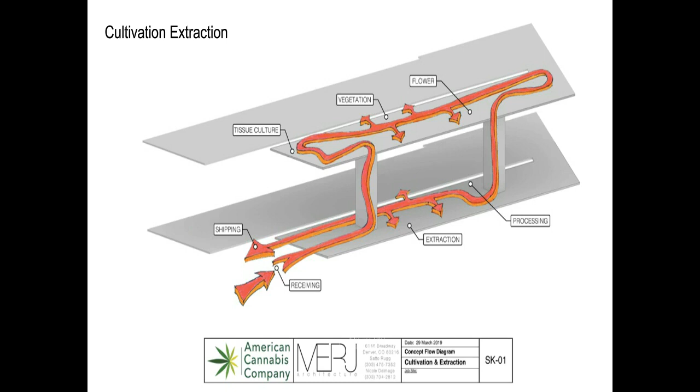Starting from those initial pieces leads into how the rest of the facility is going to be laid out and designed. So I want to go into lighting methodology and some of the ancillary spaces. There's so much stuff we've got to look at in a grow facility that cannot be overlooked, and working with a team like you really helps us make sure we don't miss any of these functions.

Understanding lighting methodology alone plays a big factor in a lot of the technology going into this space. Going through these processes, these questionnaires, and really nailing down all the details from the client is imperative so that we make sure we don't miss any of this.

We also like to design around clean and dirty zones. If you see on the slide presented, we are really trying to limit access into cultivation space versus anywhere outside having to do with the plants. For us, people are the major source of contamination. We want to prevent them from coming into the space if we don't have to, really limiting only the grow team to that area.

As you see the workflow, when they come into that area we really require them to take a shower, change their clothes, and go into that space knowing they've gone through a decontamination process. So do you guys see a lot of these decontamination chambers in the design and build that you're doing? And if so, what are some of the options, from air showers to regular showers to just changing rooms?

In this facility, we went through a process really similar to what you described, Ellis. When you come into the building, on the lower floor there is a staff area where you're expected to leave your outdoor clothes and bags in a place that doesn't get pulled into any of the workspaces. Once you've changed or gowned into your work clothing, you'd go upstairs to the second floor. We really isolated the cultivation area on the second floor in a really intentional way, because when you come up into this space through an elevator or stairs, there's a decontamination zone where you can be air showered off.

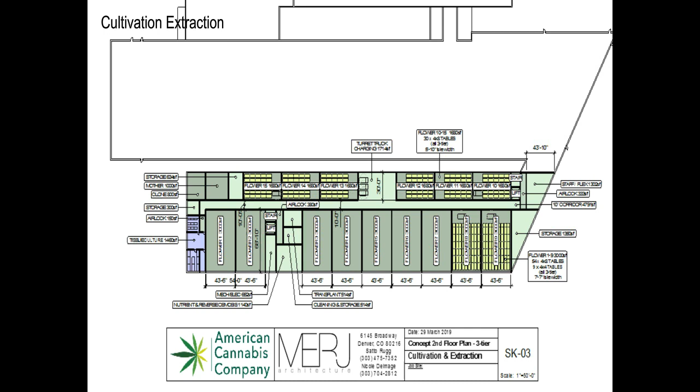One of the aspects of the growing process that I find really interesting—and I'm changing directions here—the next slide shows just a concept layout of a tissue culture component to an indoor or outdoor grow, where there might be a head house attached to a greenhouse where you could manage your mothers, your clones, or the tissue culture part of the process. I wanted to point out that each room has its own specific needs when it comes to performance and growing, making sure that everybody, including the plants, are happy.

And this little diagram—when we started working on this with Mitch Day from Ellis's organization, we started to learn that the HVAC, the flow of air through this grouping of rooms, is really critical to this piece working.

So when we're looking at outdoor grows, we still have an indoor need that would be adjacent to support that process. This little diagram just demonstrates that these rooms are potentially necessary and they're an accessory to an outdoor grow, where you're not simply farming or growing—you also have these other amenities that are really important to the overall outdoor grow organization.

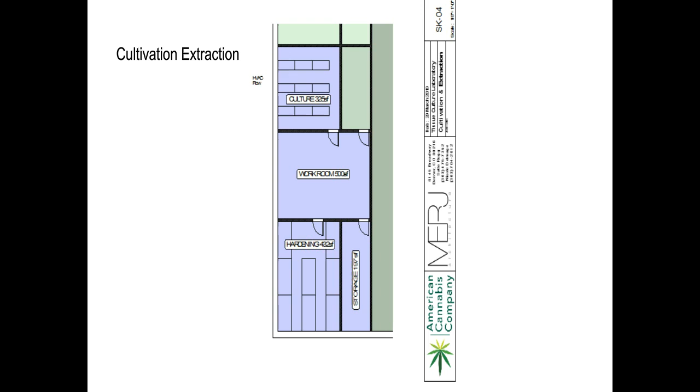All right, I'm going to switch gears and move on now to extraction. We could probably talk for four hours on cultivation, but let's move through this next component here on the extraction and processing design. This is a whole other can of worms. I specialize in growing the plant. As we get to the extraction side, this is a whole other level of building codes, a whole other level of security and safety. So let's shed some light on this component and the complexities that really go into this.

Extraction is a big piece, and there are some relatively simple and straightforward extraction processes that do not use a lot of hazardous chemicals, do not use a lot of flammable gas or liquids, but those are in the minority and usually smaller scale. A lot of people are using butane, a lot of people are using ethanol in large quantities, and some of the facilities we work on are very large quantities of materials. The first thing you run into is building codes and fire codes.

Rightfully so, the authorities are going to be paying a lot of attention to your extraction process. They will go through it with a fine-tooth comb, all over any kind of inconsistencies in your design, looking for building safety to make sure the architecture will support and protect in the event of a fire or hazardous situation. Even CO2 can be dangerous—it will accumulate and be very dangerous to human habitation. So alarm systems have to be installed to evacuate air and make the place safe if there was some kind of leak.

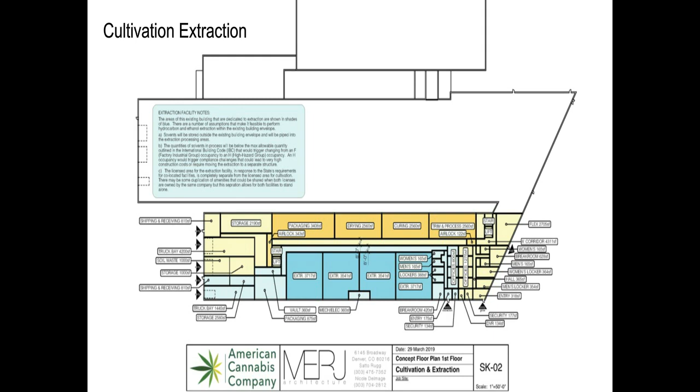Satto, go ahead, we'll go to the next slide and say what you had on your mind. Actually, I was going to go to the slide and let you talk about it, but I'll just quickly say that...

We've talked about extraction, we've talked about cultivation, we're going to talk about dispensaries in a moment, but there are combinations of all three. In fact, we did a little bit of preliminary work on a combination which was going to be a dispensary and an extraction facility, which is an odd combination. But sometimes everything gets packed into one building, and this is an example of an early version of a project that had a testing lab. So I just want to mention testing labs and research labs.

Testing laboratories are usually state mandated testing. That's how their business model works, and they would be separate from a facility, but often a company that is very interested in product quality or product innovation, including cultivation innovation and purity of their plant strains, and maybe researching terpenes and things like that, they will have a research lab, and that is another highly technical, highly controlled environment.

And this is now coming to light in the fact that international trade is starting up. Once you go international, you're going to be dealing with standards of GMP processes and regulations that foreign countries generally require. They will not allow your product out of the country unless you have proven that your facility meets these GMP standards. And that leads directly back into architecture and the design of the space.

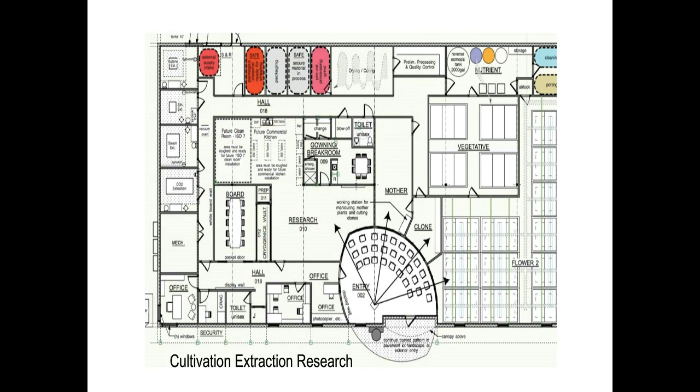Great point. We'll touch on another slide here that combines the dispensary and extraction. We'll get to that in a few minutes and can touch on those marriages as well, with the retail experience and extraction being a part of that too.

As we move on to the dispensary component, I look at this in two perspectives: the front of the house and the back of the house. Front of the house is obviously the whole customer experience - what's it like coming to the door, ordering product, and then leaving? The back of the house is what it's like for the employees that work there. How does product intake happen? How does inventory management, storage, and control processes happen? And during daily workflow, how do you keep shelves stocked if supply gets low? And at night, how do these folks close down with ease of workflow, not having to empty all the shelves and restock in the morning.

So the dispensary component is a whole other can of worms. It's really bringing in the retail concept, but also the inventory management component. So walk us through your dispensary process here.

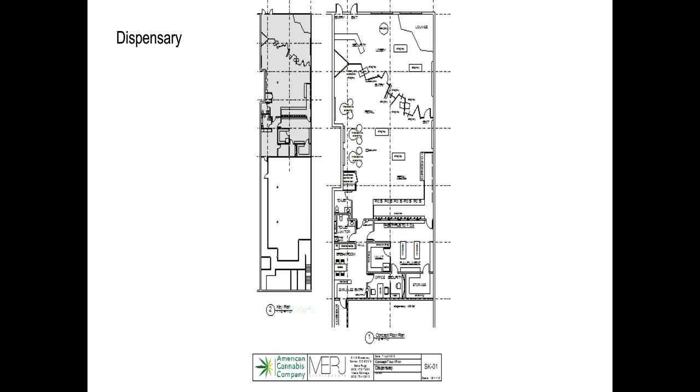The next slide shows a dispensary that has all the same components as the one we worked on with ACC, but it also has a small extraction facility. You'll see darker green equipment zones shown in two of the rooms. It's a small enough facility that we're not highly regulated, as we talked about for the really large facilities. The process is that once the product comes into the facility, it'll go through an extraction process, but we have to have enough room for packaging and make sure these two uses fit together well.

For us it was about making this an attraction. How do we make the dispensary experience go above and beyond our competitors? With this particular client and partner of ACC's, this was a lot of fun to put the two in the same space. You see this quite a bit actually, in all markets where people have commingled these uses.

Some are using all three. I'll give a shout out to Seed & Smith here in Colorado. They've got a great little facility that you can tour through. They actually offer tours, so call them up. You can see they host a dispensary with extraction and cultivation, and they have a viewing window in the dispensary so you can see some of the extraction and cultivation processes.

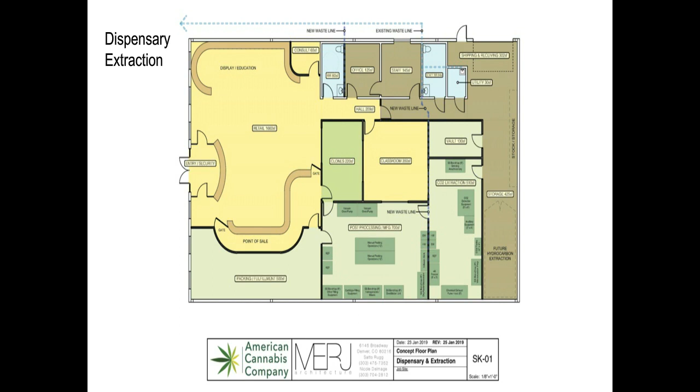With that being said, we've got a minute or two here before we're up with our time. I want to wrap this up today. We went through a lot of content—we could have spent hours and hours on each topic as they can both go so granular and so deep. But just as some parting words, would you guys like to wrap up and say anything to our audience?

What I'd say about this part of the project is that having some expertise around merchandising or product placement, you can create a great space that really speaks to people. But then when you put the product in it, you're in a unique situation where you can't put marijuana on the floor for clients to pick up and smell.